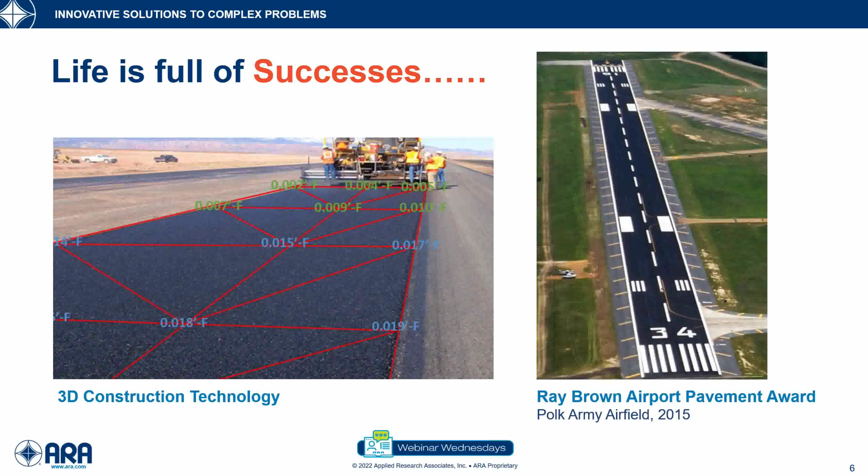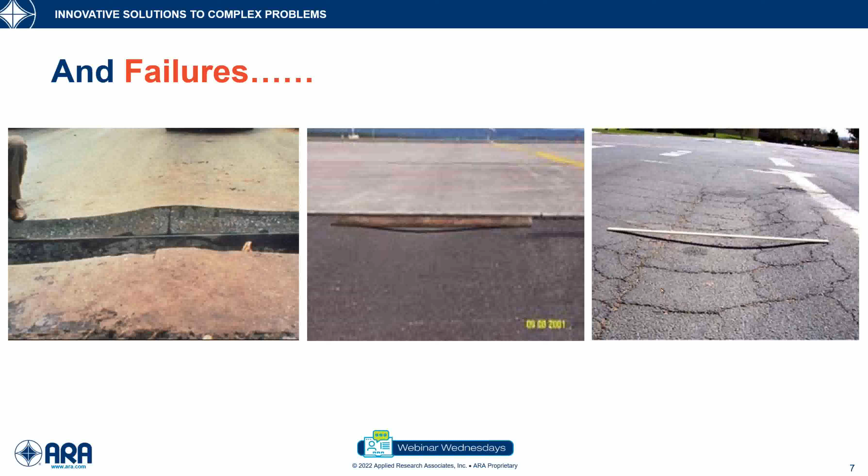Again, you see more failures here, and thus you could tell that the scope of this study here is the rutting in airfield pavements, particularly airfield pavements that witness very heavy traffic volume, heavy airplanes as well. So we're talking about large airports, hub airports, and we want to see what causes these ruttings.

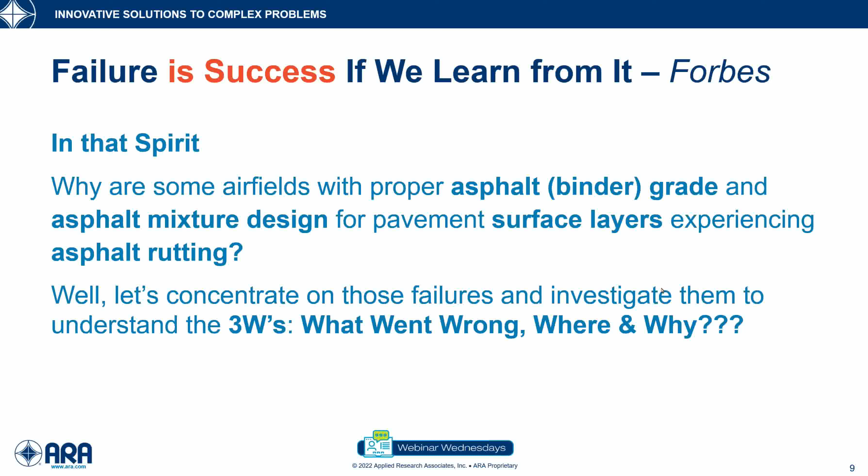So failure is success if we learn from it. This is not me speaking, this is Forbes. And in that spirit, the question that poses itself is why are some airfields with proper asphalt binder grade and proper asphalt mixture design for the pavement surface layers experiencing asphalt rutting? What are we doing wrong? So let's concentrate on those failures and investigate them and understand the three W's: what went wrong, where did it go wrong, and why it went wrong.

So I'm going to start with the background and the motivation behind this study and the objective that I am pursuing. And beginning and talking about the scope of the study and the methodology that I adopted in achieving my objective. First talk about material characterization models.

We need to characterize how the asphalt mixtures behave and perform under various climatic conditions versus various loading conditions and so forth. And then once we develop these models and incorporate them into software packages that predict the performance of a pavement, we want to focus on what are the factors that affect asphalt rutting.

And then after we do that, we'll try to predict asphalt rutting for actual airports, actual airfields, for actual mixes, actual aircraft that land and take off from there, and compare it with the measured rutting from the field from that airport, and see how valid, how accurate are our models and our simulation from the software. It's called FlexPave, and we will talk about that later on. And then finally, we'll come up with the conclusions from the study and recommendations as how to avert or avoid such failures in the future.

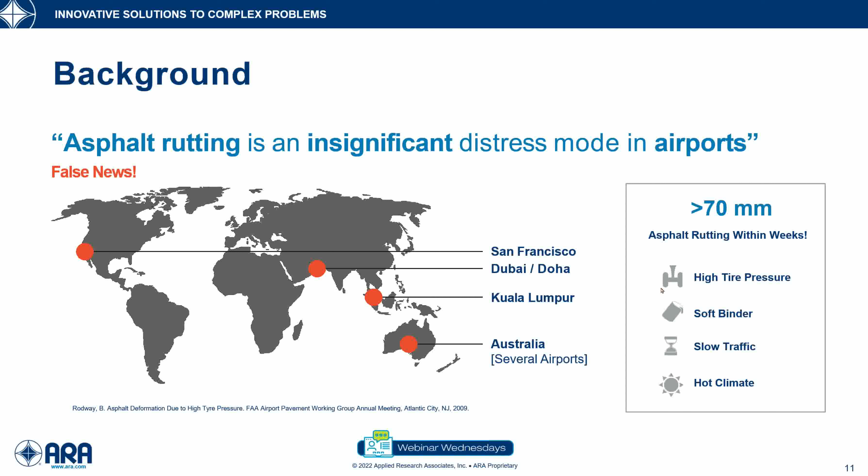In the Superpave binder specifications for highway applications, it's stipulated that if you have slow traffic, you need to bump the PG grade by one. And that means your binder needs to be stiffer because of the slow traffic. And when you bump it by one grade, as if you're saying that the temperature of the pavement is higher by 6 degrees Celsius. So the binder has to be stiff enough to take that extra 6 degrees Celsius that's higher. If you have stopping traffic, you need to bump the performance grade of the binder by 2 grades, by 12 degrees Celsius.

Now, this is for highway applications, and the common practice is to just grade bump only the surface layers. So we don't really bump the grade of the layers below the surface layer, the layer at the top of the pavement. And these lower layers, whether we call them base layers or binder layers, really don't experience as high a temperature as the surface layer, and thus we tend to ignore bumping the grade, and we also try to minimize the cost of the project. So we try not to bump the grade because bumping the grade entails modifying the asphalt with polymers or acids, so it just becomes expensive. So to come up with a lower cost in the pavement construction, we don't bump the grade of lower layers, mainly base layers, also called the binder layer.

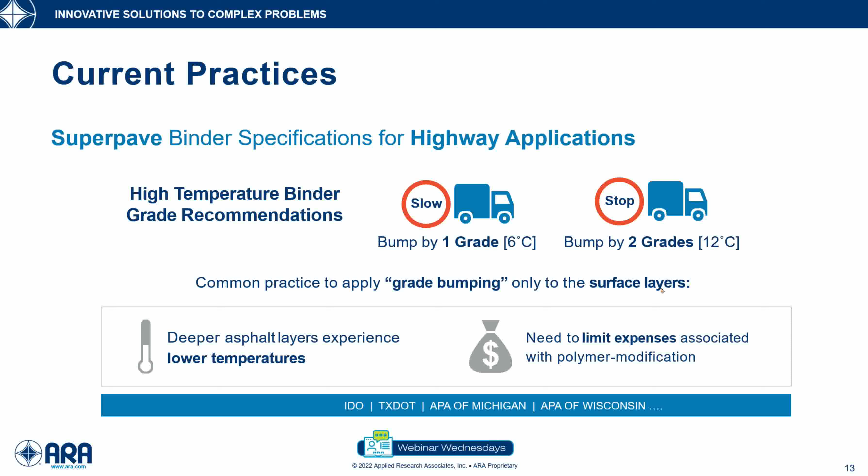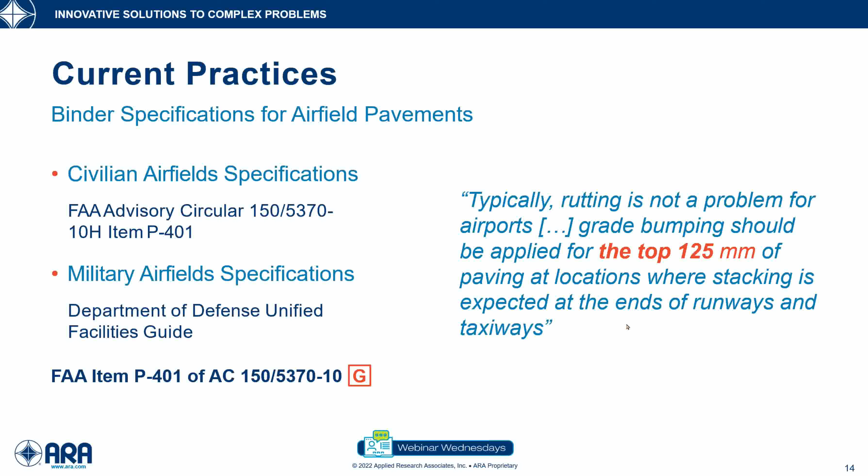That's for highways. For airfields, there are specifications for civilian airfields that are set by the FAA, particularly for asphalt mixtures. In the circulars, we look at item P401 for asphalt mixtures. For military airfield specs, the DoD sets these specifications. Now, in the FAA specifications version G, it stipulates verbatim that typically rutting is not a problem for airports. Grade bumping, however, should be applied for the top 125 millimeter or 5 inches of paving at locations where stacking is expected, at the ends of runways and taxiways. So FAA does acknowledge that, yes, also in airports, we need to bump the grade, but only for the top 125 millimeters.

I'm sorry, I'm always going backwards in my slides. Now, in version H of item P401, the bumping now is not a function of depth. It's a function of the gross weight of the aircraft. So depending on the weight of the aircraft, depending on the pavement type, maybe whether it's a regular part of the airport that's not too important, or if it is part of the airport that witnesses stationary traffic or slow traffic, those dictate what the bumping of the grade is.

So, for example, for a very heavy aircraft, let's say 777-300, waiting on a taxiway, that area needs to be bumped by 3 grades. However, there's no mention of the depth to which the PG grade bumping is recommended. They just say that you need to bump the grade, but how deep? 100 millimeters, 200 millimeters, 50 millimeters. So that's what was missing.

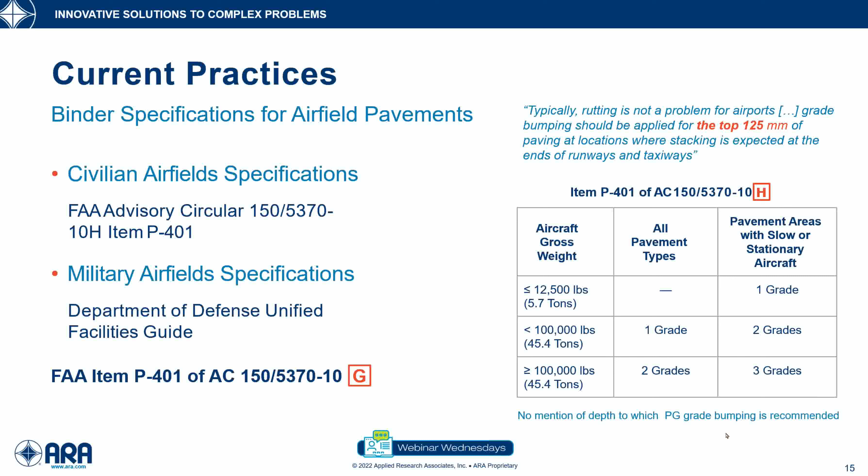Now, designing the airfield pavement is pretty much similar to designing a highway pavement, where the common approach is to follow a multi-layered pavement design. The surface layer is the stiffest, followed by lower layers that are softer. However, contrary to that, in the French approach, the surface layer is softer and the base layer or the layers below the surface layer are stiffer.

Now, there are challenges and complex loading mechanisms in airfield pavement design. Some of which are the large gross weight and tire pressures, the wide range of traffic speeds on a runway or a taxiway, and the channelized traffic of the airplane. They all pretty much land at the same spot, particularly with the adoption of the ILS, the Instrument Landing Systems.

Now, the Airfield Asphalt Pavement Technology Program did release 2 projects. The objective of the first was to incorporate the aircraft tire pressure factor in deciding whether we should make the pavement surface layer stiffer or not. And another project looked at whether we should modify the high temperature PG grade or bump the binder grade for deeper layers or not.

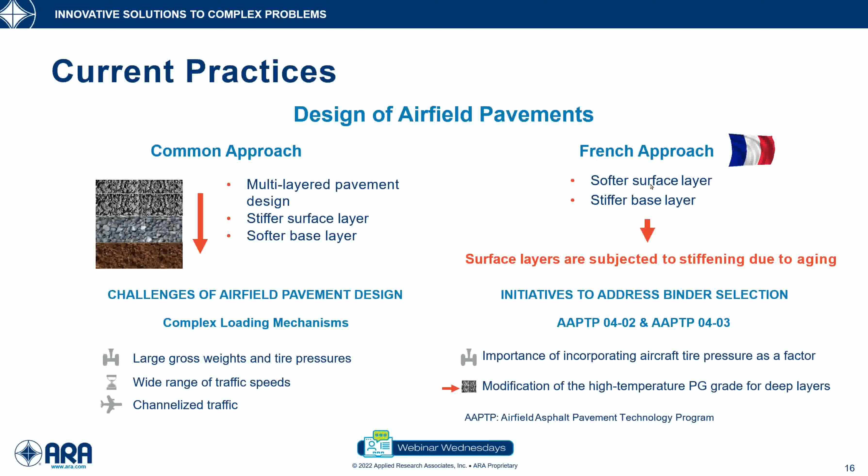So the objective now is to investigate asphalt rutting failures that are not caused by inadequate asphalt mixture properties in the surface layer, by considering the possible contribution of the asphalt mixture properties of the base layer. And again, when I say base layer, that's the second layer or the layers underneath the surface layer or the top layer. So the surface layer has been designed well and the mix properties are well chosen and tested. How about the base layer? Could the base layer properties lead to the rutting failures that we are witnessing or not?

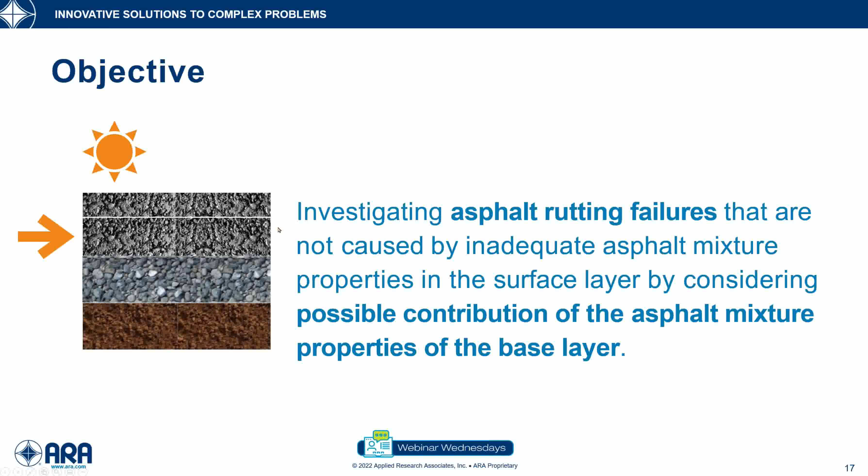So, to explore whether these base layer properties are affecting rutting or not, we need to do a mechanistic analysis, just basic solid mechanics analysis, but using 3D software. It's called FlexPave. It's a 3D nonlinear finite element software. It performs mechanistic performance analysis. It incorporates viscoelastic continuum damage models for fatigue cracking. So there are nonlinear and fatigue models in there.

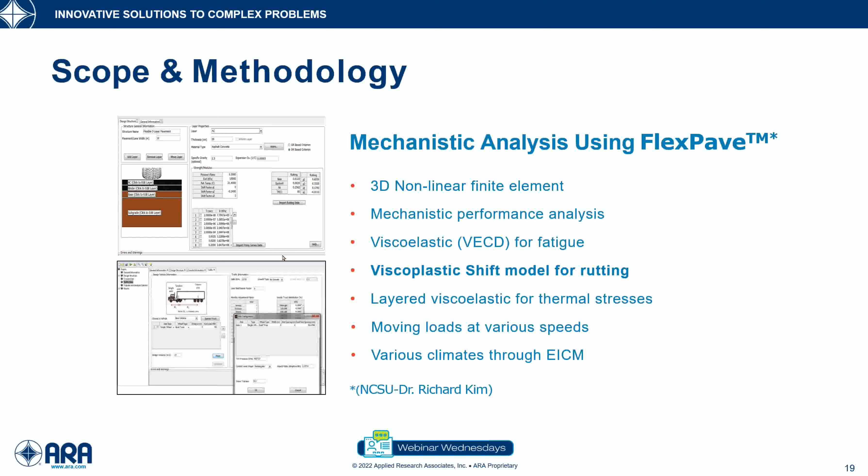It incorporates the viscoplastic shift model for compressive rutting strains and stresses. It also deals with layered viscoelastic solutions for thermal stresses and thermal cracking. And it does incorporate moving loads at various speeds. It also incorporates the various climates through the enhanced integrated climatic model. Now, the software has been developed by Dr. Richard Kim at North Carolina State University.

Whenever we want to do the mechanistic analysis, we need to know what are the factors that we need to look at and evaluate. Three important factors are the compressive stresses that the airplanes impart on the pavement surface, the loading time or the speed of the aircraft, how much time that weight is being applied on the pavement, and what is the pavement temperature. So we need to evaluate these three factors in our analysis.

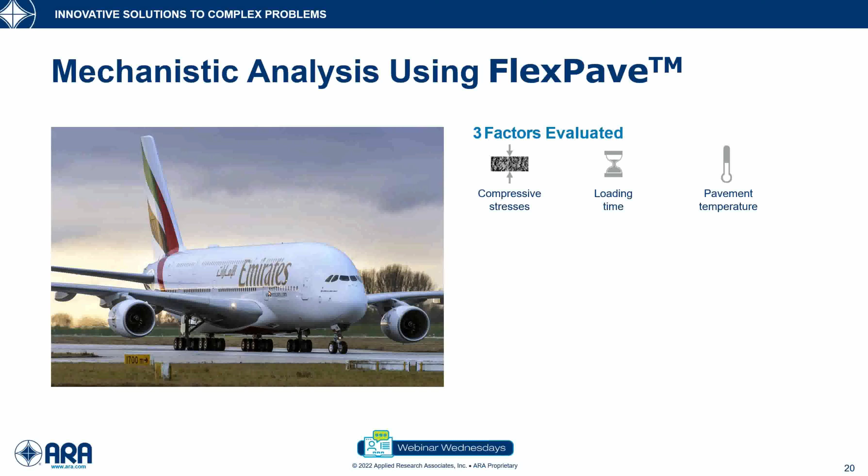We also need to look at the gear configuration. There are various airplanes with various gears. We're going to look at the gears of a 777-300, basically tridem axles. We're going to look at the gear of an Airbus 320. We're going to compare those to an 80 kilonewton ESAL of a truck to see the impact of the gear configuration, the axles, on the rutting from the base layer.

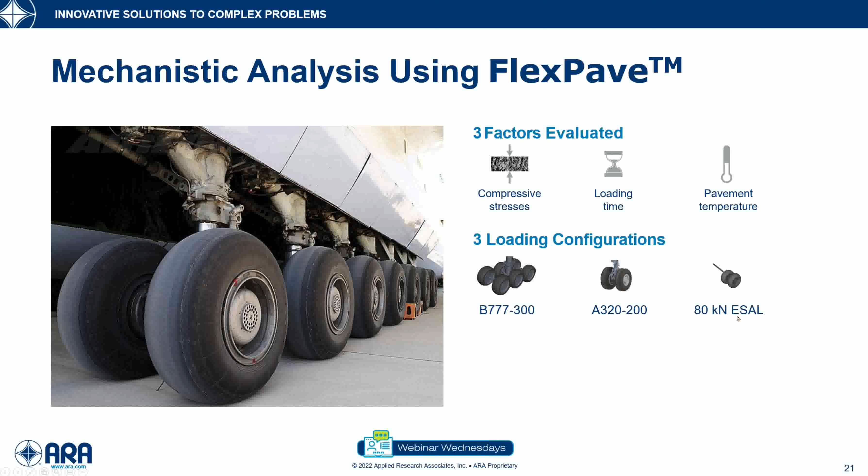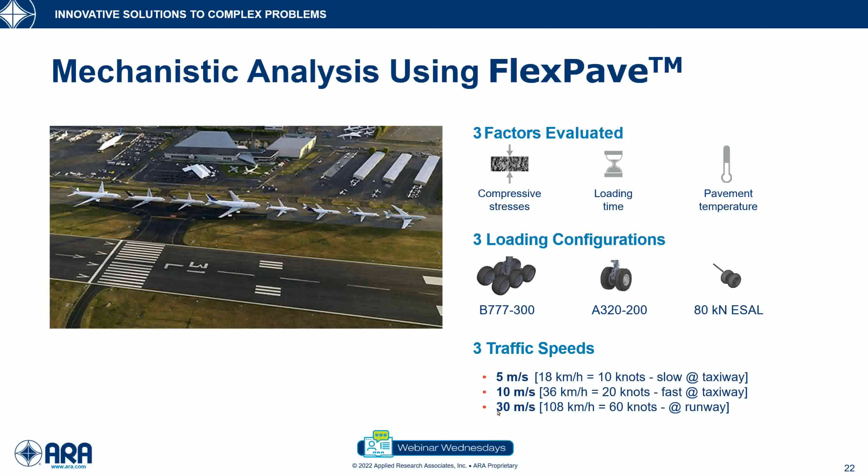We're also going to look at traffic speeds. What we will do is evaluate the rutting due to three different speeds: 5 meters per second, 10 meters per second, and 30 meters per second. 5 and 10 meters per second are witnessed on taxiways. 30 meters per second is experienced on a runway. So we need to configure all these different criteria in our analysis to see which ones are really impacting the rutting and which are not.

Looking at the characterization, for the analysis, we need to have asphalt mixtures to include in our characterization. So what we did is we went to a real actual airport that witnessed rutting. Some of that rutting was significant. So it's a real case study, a real airport. And we got three asphalt mixtures that were used in that airport.

So we got a surface mix, a mix that was put on the surface, we call it mixture A. And we got two different base mixes, mixes that were put in the base layer. One is stiffer than the other. One is performance grade 70, the other is performance grade 64. So as you see, the dashed orange line here is a stiffer mix than the purple dotted line.

What we are seeing here, these curves are the complex modulus or dynamic modulus, or the stiffness, let's say, of a viscoelastic material of these mixes as a function of frequency. So we measure the modulus of these mixtures as a function of frequency, but we later convert it to a relaxation modulus as a function of time. And that is needed because of the modeling and the software. So we convert it to relaxation modulus, or the modulus that is a function of loading time. All these mixes that we brought and sampled are compliant with FAA P401.

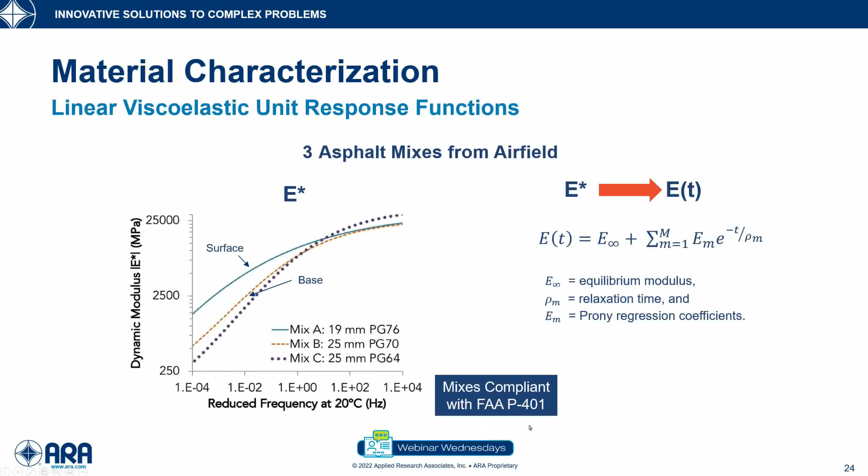Now, the viscoplastic shift model that we're going to use in the FlexPave software, our mechanistic analysis, utilizes the SSR test, or the stress sweep rutting test, which we'll be talking about later. That test is conducted for various deviatoric stress levels, various loading times, various temperatures, and we obtain the viscoplastic strain data at these different conditions. We then make use of the time-temperature superposition principle with growing damage and the time-stress superposition principle. From these principles, from the SSR test, we developed the viscoplastic strain master curve. That viscoplastic strain master curve at reference conditions, at a specific temperature and a specific stress, can tell me exactly what is the strain for any number of cycles of these conditions.

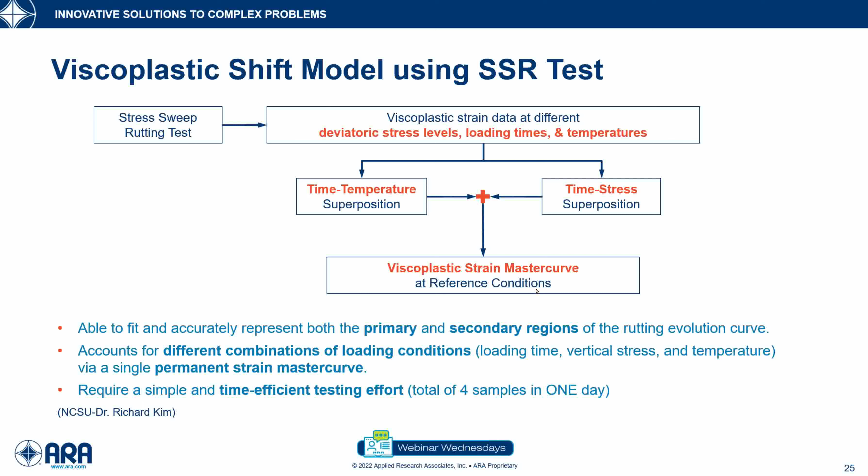So what is this SSR test? The SSR test was developed for highway conditions. It's AASHTO TP134-19. We run blocks of sinusoidal loadings at two temperatures, T high and T low. Both these temperatures are a function of the climatic zone and the PG grade. So we're going to run the test repeated for two different temperatures. We run three different blocks of sinusoidal waves. Each block consists of 200 cycles, 0.4 seconds of loading time, and 3.6 seconds of rest period to allow any recoverable strain to recover. We load at 200 cycles at 100 psi, 200 cycles at 70 psi, 200 cycles at 130 psi. And we measure, of course, the strains from these loading blocks. We also apply confining pressure of 10 psi.

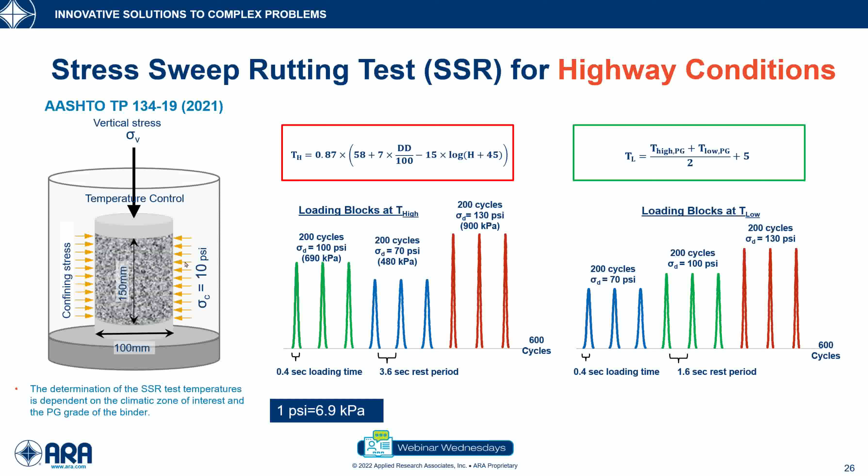The deviatoric stresses and the confining stress are all basically obtained from a finite element analysis that simulates the stress and strain states under truck traffic on a highway, the highway condition. Now, for airfield conditions, aircraft tire pressure is higher and the load is heavier. So instead of the typical loads we just saw, we increase the vertical stresses by 100 psi and the confining pressure by 20 psi, and we repeat the SSR test.

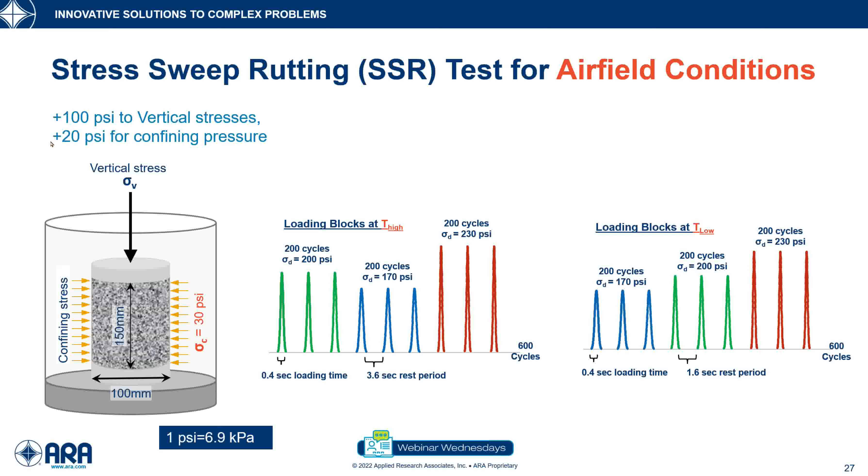The shift model now, we talked about the SSR test. We do have the viscoplastic strain measure. We do have the time temperature superposition principle available, so we can find what we call the reduced load time shift factor, or the time temperature shift factor. We can also find the time stress shift factor. Finally, I'm not going to go too much into the equations, but the formulation of the viscoplastic shift model basically allows you to calculate the viscoplastic strain for any reduced number of cycles. And by reduced number of cycles, I mean the number of cycles at a specific reference temperature and stress. So for a given temperature and stress, I can know what the viscoplastic strain is for a reduced number of cycles. Now, because of the applicability of time temperature superposition and time stress superposition, I can then know what the viscoplastic strain is at any number of cycles for any temperature, for any stress. And that's the power of the shift model. Now, the shift model does have coefficient or fitting parameters that we need to determine, and we can determine those from the SSR test.

I'm not sure why it's moving by itself. Okay, sorry about that.

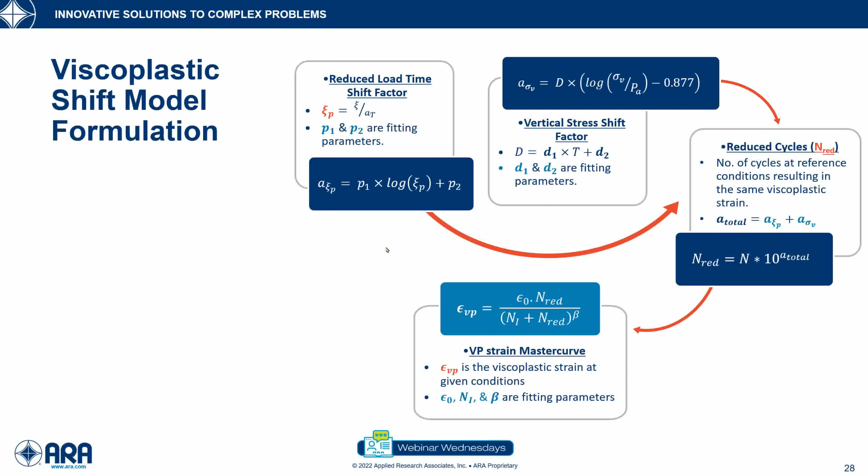At T low, we see the same thing. Good match between the replicates for the surface mix, but expected variability in the binder mix specimens because of the poor construction that was witnessed, poor materials that were used, and the large aggregate size.

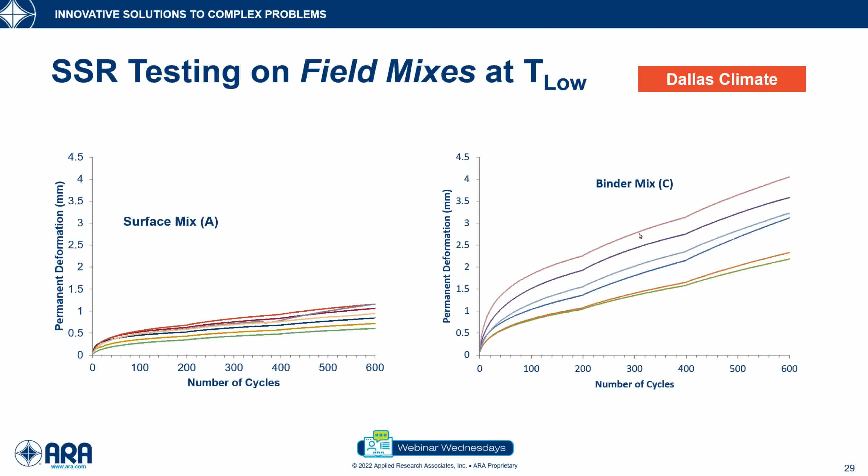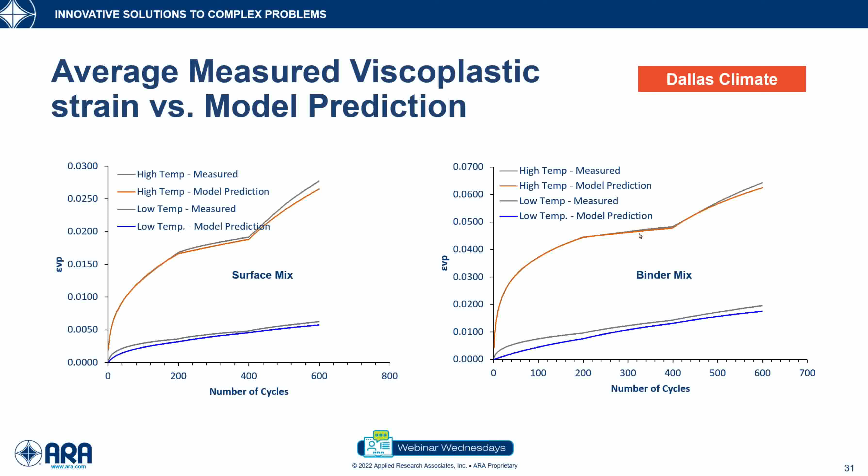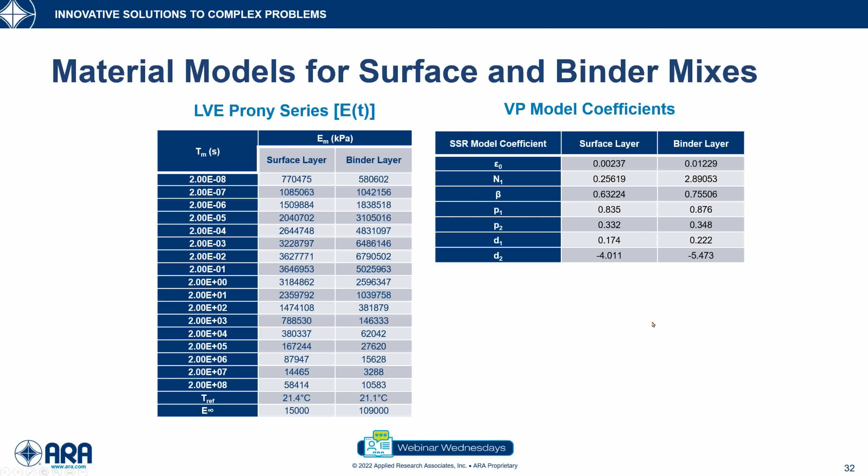And so here what you see is I have now the Prony series coefficients of the relaxation modulus needed to model the asphalt concrete or the asphalt mixtures in the linear viscoelastic state. For the nonlinear viscoplastic state, the shift model is also developed for both the surface layer and the base layer or binder layer C. These are the coefficients of the shift model. So now I have fully characterized my mixes in both linear viscoelastic range and the viscoplastic range.

So what are the factors affecting my rutting now? Again, using these three mixes from the airport, I will take a reference scenario. I will do the analysis for rutting using, first of all, a reference scenario, which is a B777-300. I will assume I have one layer that's 40 centimeters thick in my pavement structure. It comprises mix type A, and it is for a speed of 10 meters per second. The aircraft speed is at 10 meters per second. That's my control case. To know what the effect of the gear type is, I keep all the other factors constant. I only change the gear, and I replace the gear of the 777 by a gear of the A320 and a one single ESAL. And thus I can see what the effect of the gear type is.

I also want to witness what is the effect of speed of the aircraft. So keeping everything constant, I only change speed. I go slower to 5 meters per second and faster at 30 meters per second to see the effect of speed on rutting. I also want to see what is the effect of having multiple asphalt layers instead of one, and what is the effect of having mixes of different stiffnesses on rutting. So in one case, for the same 40 centimeters, instead of mix A, I use mix B, which is softer. And then, everything held constant, I divide that 40 centimeter layer into two layers: a surface layer, 15 centimeters, and a base layer, 25 centimeters thick. I use mixes A and B respectively. And then I use mixes A and C respectively to see what is the impact of having two different mixes on rutting.

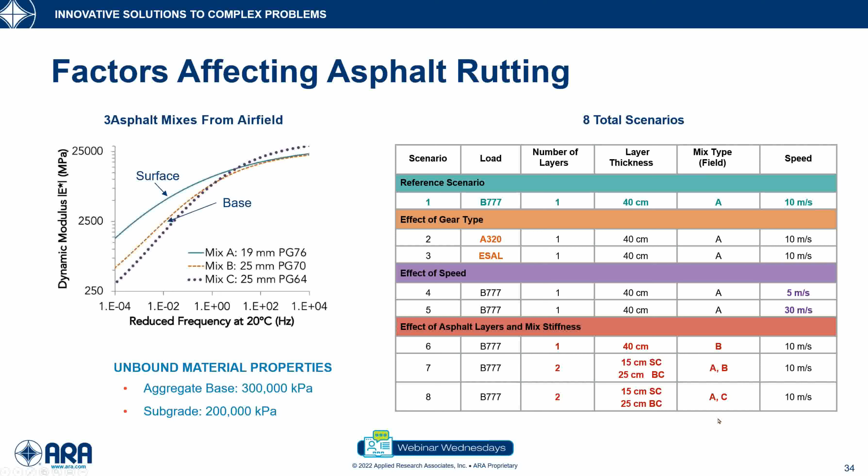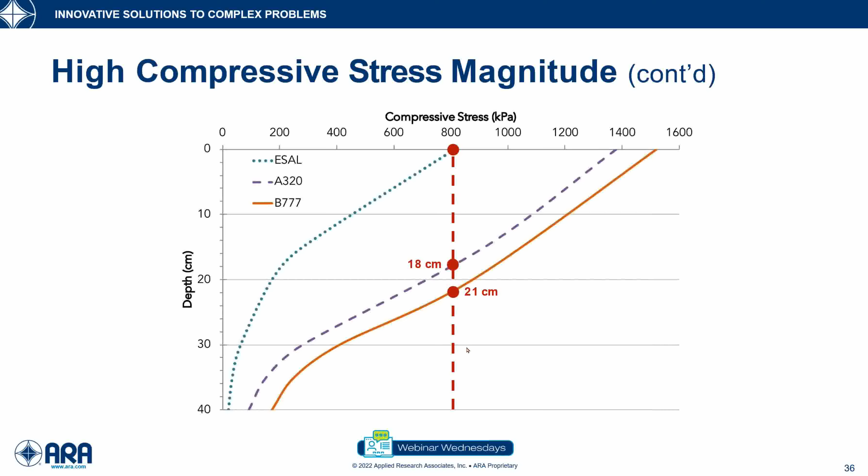So at 20 centimeters deep in an airfield, I'm still witnessing high compressive stresses. And what I do at the surface for highways, I need to do deep down in the base layers for the aircraft, because at 20 centimeters I'm pretty much going into the base layer and leaving the surface layer. So that tells me there's high compressive stress even in the base layer in airfields.

And what is the effect of the gear type? For an 80 kilonewton ESAL, the loading time is only 0.02 seconds at the surface. However, the loading time of an A320, because of its gear type, is 0.05 seconds. It's 0.07 seconds for a 777. So it takes much more time for a 777 to pass over a certain point in the asphalt.

If I go to the depth of 30 centimeters, an 80 kilonewton ESAL's load is felt for 0.20 seconds. However, for a 777 at the same depth, the load is felt for 0.60 seconds. So the loading time at 30 centimeters is felt for a much longer period of time. And the longer the loading is felt, the softer the mix becomes. That's because it's viscoelastic. Longer loading time, slower speed means the mixture itself is going to become softer. So at 30 centimeters deep, I'm in the base layer, and the base layer is becoming softer just because of the gear type.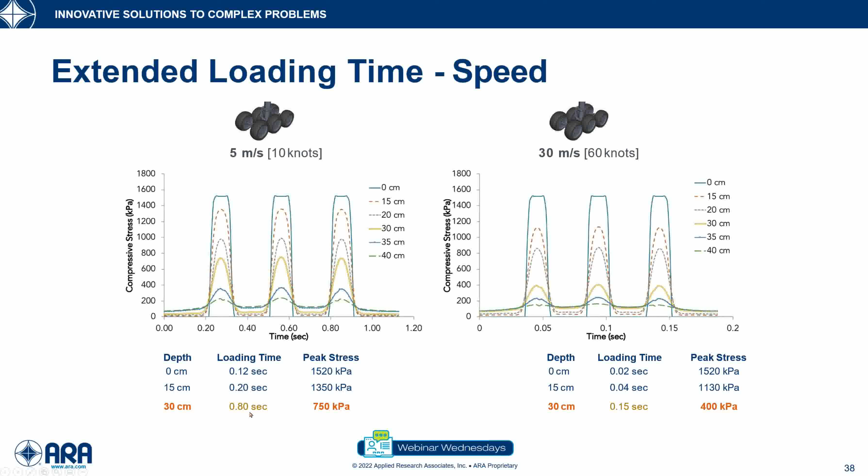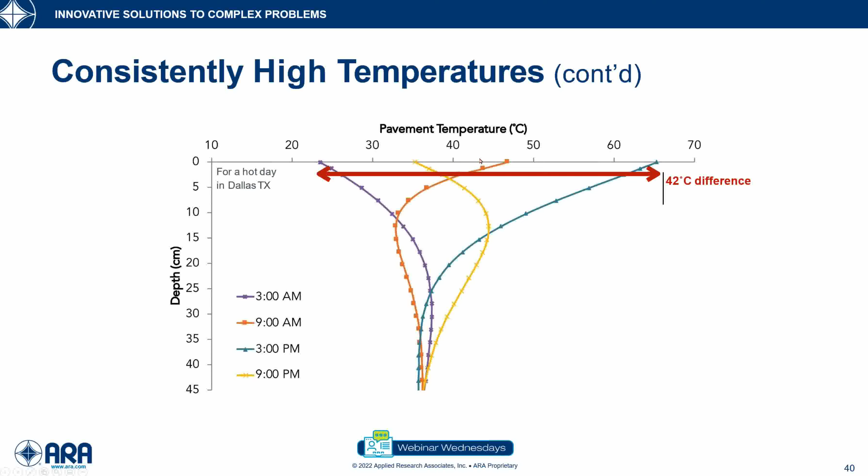Now, nothing is going to happen at low temperature. So let's say it's going to happen between 40 degrees C and 65 degrees C. So basically, between noon time or morning time and the afternoon time is where I'm going to see hot temperatures causing rutting. However, if I go deep to 35 centimeters, where I have the base layer, temperature now is constant, regardless of what time it is in the day. And the temperature is not very low. It's just less than 40 degrees C. That is enough to cause rutting. So I have a temperature that is lasting all 24 hours, and that temperature is high enough to cause rutting in the base layer.

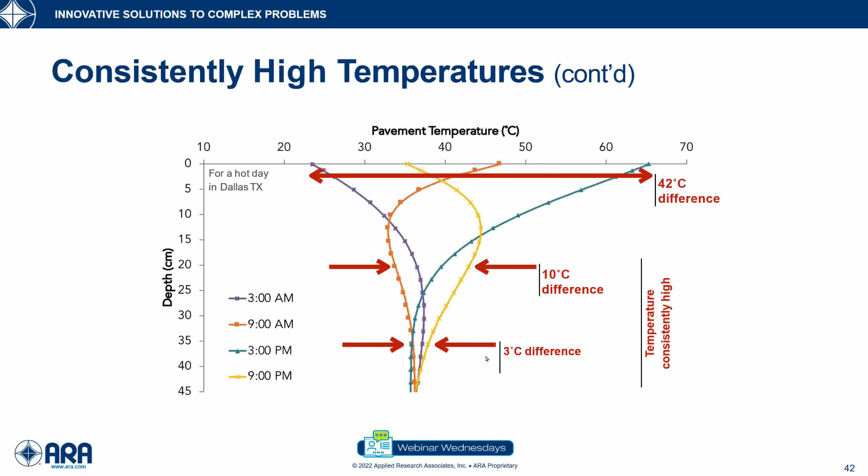So I have about 40 degrees C as a consistently high temperature as I go to the base layer. Of course, it's not as high as the surface layer, but at the surface, that hot temperature is only applied for a shorter period of time than in the base layer. So the base layer is feeling high temperature, and again, that high temperature is making it softer. So I have three effects now: gear type, speed, and temperature, all contributing to softness in the base layer.

So if I look at the effect of gear type on the compressive strain, where is the difference in compressive strain between a 777 and an ESAL, let's say, at its maximum? What I found out is that 15 centimeters deep in the pavement, I see the biggest difference in compressive strain. So that difference between a 777 and an ESAL, the compressive strain difference because of gear type, is at 15 centimeters deep. So that's deep in the pavement. The compressive strain difference is not felt at the surface.

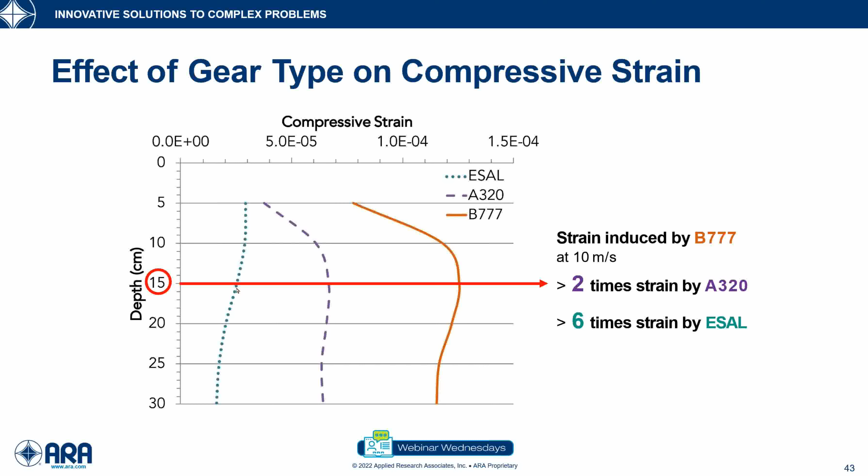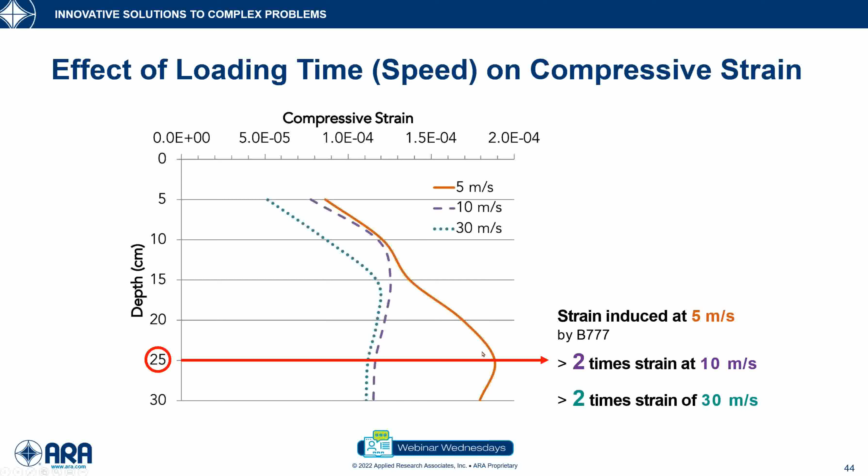It's felt deep down, 6 inches down deep in the pavement. So I need to be careful when I'm designing and choosing the mix for deep down. If I look at the effect of speed of loading time, a 5 meter per second moving load gives me a strain that's twice as much as a 30 meter per second load, but that's the maximum difference. The maximum difference due to the slow speed is felt at 25 centimeters deep, again in the base layer, not at the top, not at the surface.

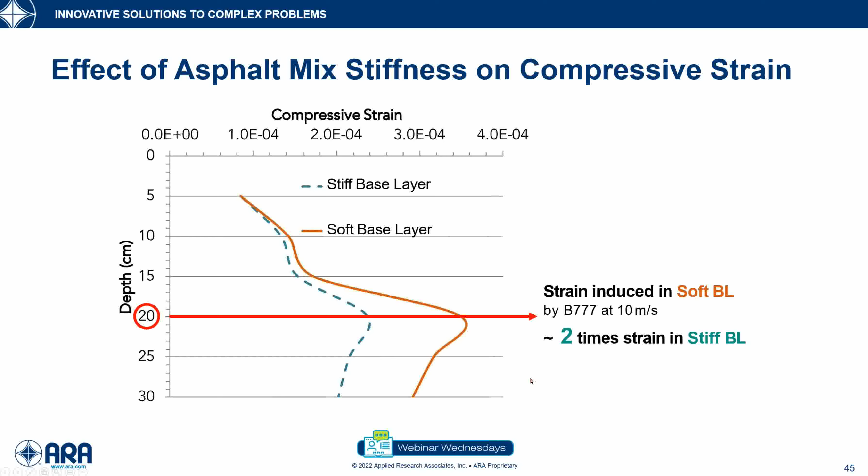If I look at the effect of a soft mix versus a stiff mix, again taking the stiff base layer, which is mix B that we got from the airport, versus mix C, which is softer, the difference is twice in the strain. So the softer mix is giving me twice the strain of a stiff mix, and that is felt at 20 centimeters deep. That's the maximum magnitude of strain, and 20 centimeters is pretty much in the base layer as well. So these differences due to gear type, speed, and temperature are felt deep down in the pavement, not at the surface layer. So I can now calculate the viscoplastic strain for a 777 for a certain loading, temperature, and of course a gear type.

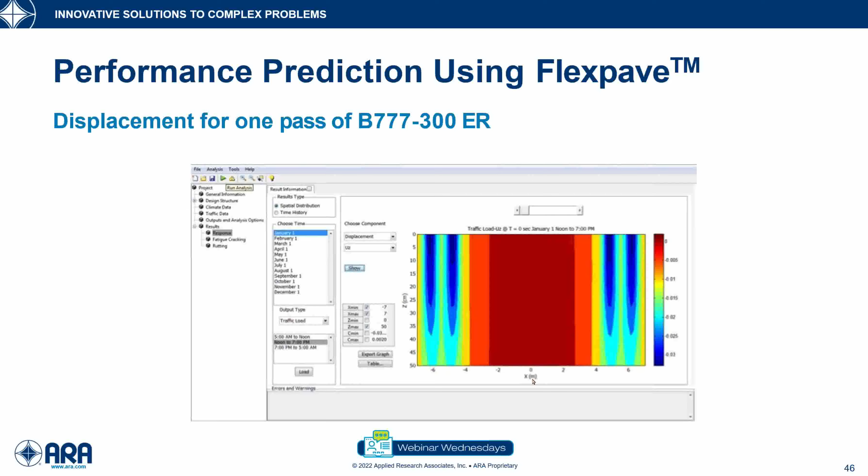But at any given airport, and at the airport of interest now, there are not only 777s landing and taking off. There are a variety of aircraft that are using that airport. Each of these aircraft, let's say you have A320, A330, A350, 777, Boeing 787, all have different wheel spacing, different tire pressures, different axle spacing, different loads. So each one is causing different damage than the other. So how am I going to calculate the total damage from this combination of aircraft? I can calculate it for one, but how am I going to calculate for a mix of aircraft? Each one has a different number of planes taking off and landing.

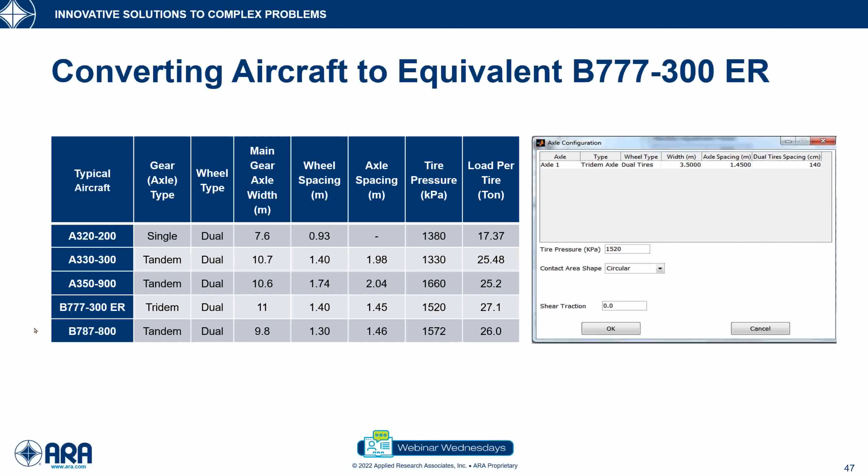And then what I do is combine their effect. I follow the same approach that I follow in highways, where I convert the effect of various trucks to the effect of a single ESAL, an 80 kilonewton axle. I convert the damage of each aircraft to the damage of a 777. And I find that the damage is about 90% for the different airplanes, about 90% of the damage that a 777 causes. So what I do is divide that damage by that ratio of damage. I'm going to call it the equivalent gear factor. Instead of equivalent axle load factor, an equivalent gear factor.

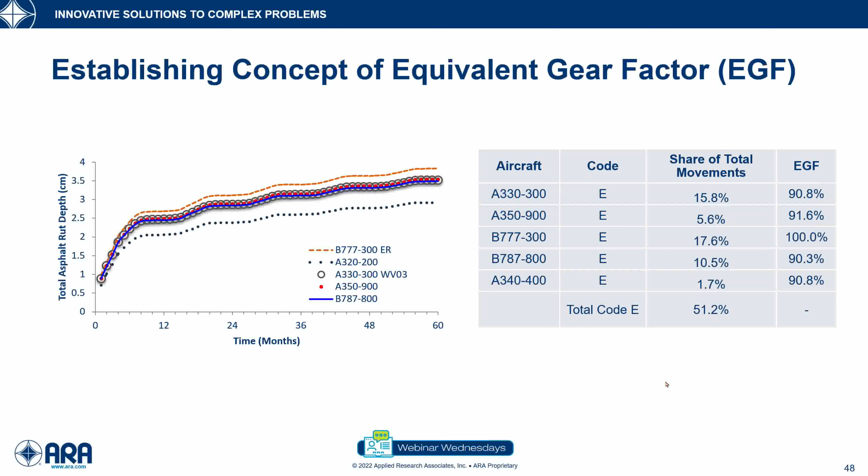And now I can combine and accumulate the damages of all these aircraft into the damage of one single equivalent gear. Multiplying the share of the total movements by the equivalent gear factor, I get the total equivalent gears that are landing every day in that airport. And thus now I can predict what the rutting is each day due to the realistic aircraft that are landing. So everything is realistic here. The mixes are realistic. The amount of aircraft and the type of aircraft are all realistic. And I'm calculating and trying to predict the damage that it causes. And this is what you will see here.

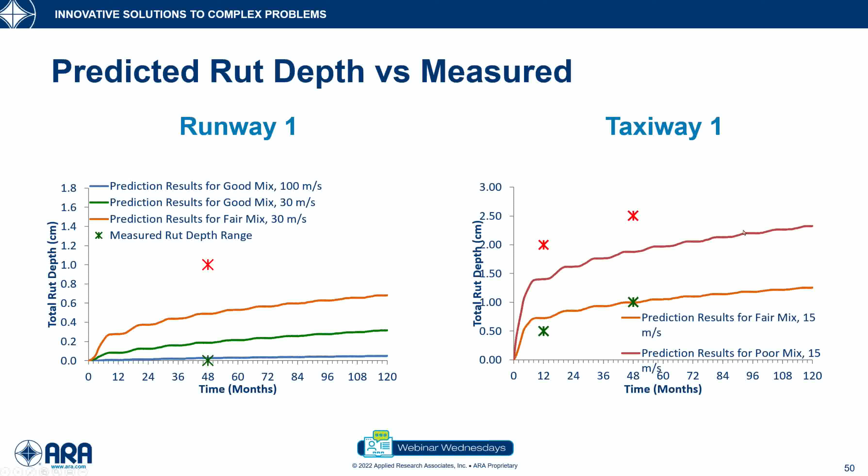That was at year 1, and that was at year 4. We didn't get more points. I don't think we're going to get more points because I think they fixed the taxiway. Going to taxiway 2, again, I do the prediction. The prediction of rutting falls within the range of ruts that are seen on taxiway 2.

Going to taxiway 3, again, I use a good mix, and its prediction is close to the small ruts that are measured. I use a fair mix. Now, the rutting for the fair mix at year 1 matches the worst rutting measured, but at year 4, my predicted rutting is higher than the worst rutting that was measured. But in all, my predicted rutting from the actual mixes obtained from cores next to the measured rut is close and within the range of rutting in that airfield element.

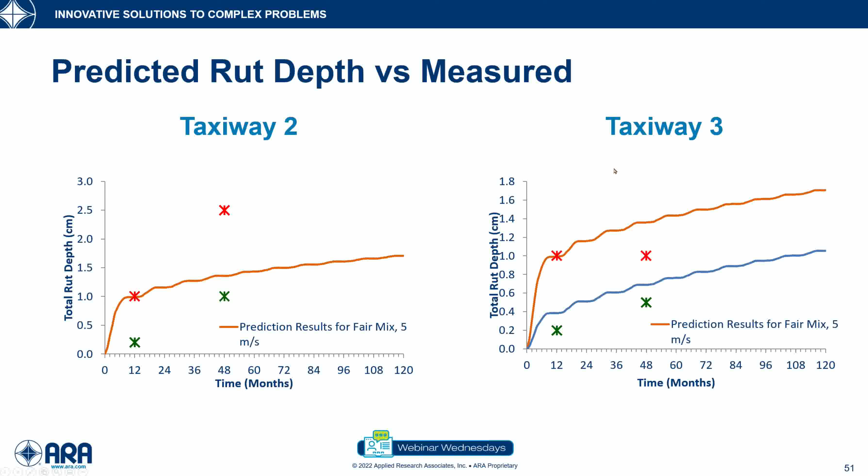What are the conclusions and recommendations? So the takeaways are the following. Deeper layers in an airfield are subjected to high compressive stresses, unlike highways. They are subjected to significantly high compressive stresses that need to be taken into account. These compressive stresses in deeper layers are applied for considerably longer loading times compared with the loading times at the surface. So those longer loading times make the base layers softer and softer. That needs to be taken into consideration because it does lead to rutting.

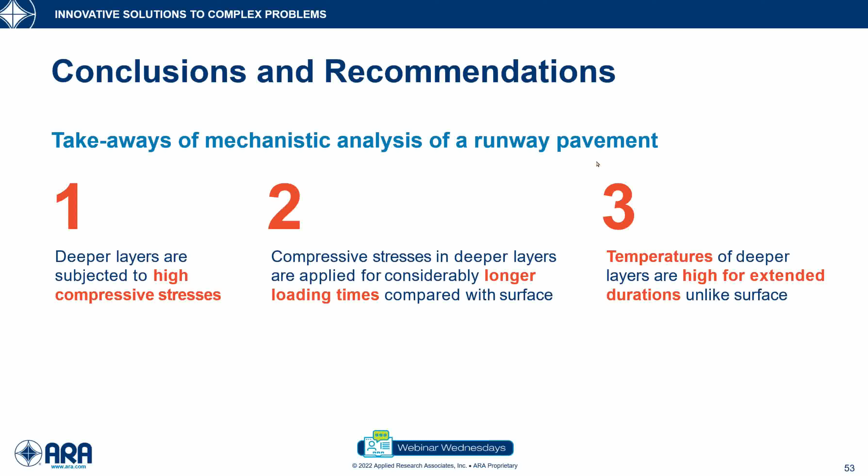Temperatures at the deeper layers are high, not as high as the surface, but they're high enough, and they are applied for extended durations, unlike the surface. And again, that high temperature for a long extended duration makes the asphalt base layer softer and softer as well. That contributes to rutting.

What we did is we used FlexPave for a variety of aircraft speeds, aircraft types, airfield elements, and different properties of the materials, and we did so many simulations. And we got a graphical conclusion. Hopefully, if you take anything out of this presentation, always remember this snapshot: for all the conditions together, if we average all the rut depths that were obtained, 70 to 80% of the ruts were obtained from the base layer. Only about 20% of the rutting in airfields was obtained from the surface layer.

We emphasize the surface layer so much. We bump their grades, we make very stringent quality control and quality assurance, but sometimes we don't put as much importance on the base layer, whether in the quality of the material, type of material, or the quality of construction. However, the rutting from the base layer is significant. That's where the rutting in the airfields that were visited was also seen, from ditches, from pits that were cut, from cores that were taken. Most of the rutting that was witnessed did come from the base layer. So what is predicted in FlexPave, and what is seen in real airfield pavements, is that it is the base layer that is giving the rutting seen at the surface.

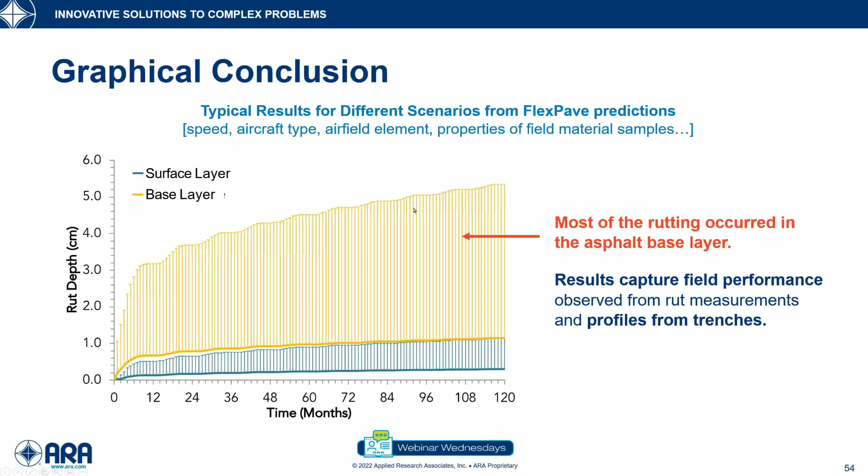The final thought I want to leave with you: depending on the mix we choose for the base layer, depending on the temperature and the location, taxiway versus runway, rutting from the base layer can exceed that from the surface layer. The stiffness of the deep asphalt layers is critical for asphalt rutting in airfields. So stiffness needs to be taken into account very carefully. And the results do warrant revisiting the PG grade recommendations for airfields to address deep asphalt layers.

So maybe we need to emphasize that deep asphalt layers do require PG grade bumping. We need to stiffen up the binder. We need to stiffen up the mixes of base layers in airfield pavements.

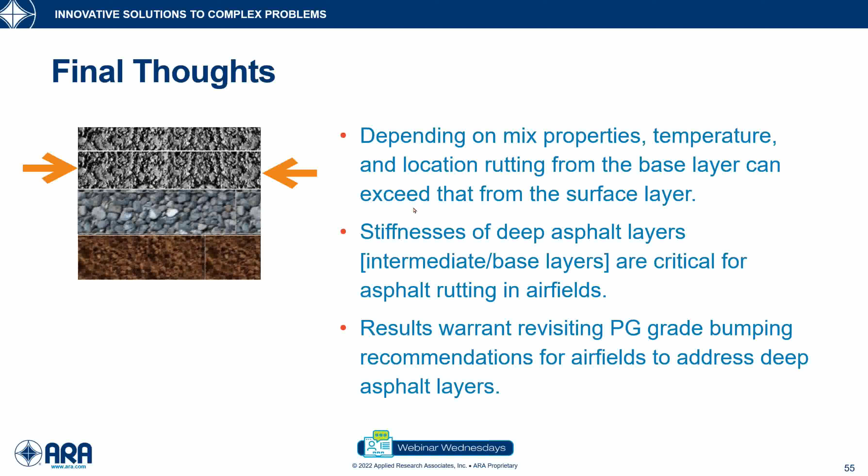I do want to acknowledge Dr. Richard Kim from NCSU for his help with FlexPave and the shift model, Dr. Hussein Qasim and Ms. Yara Hamdar, who helped in this presentation and study. And finally, this study wouldn't have been completed without the research and work done from the office and from feeling the heat by going to the airfield and witnessing everything firsthand. And I thank you for listening to this presentation.